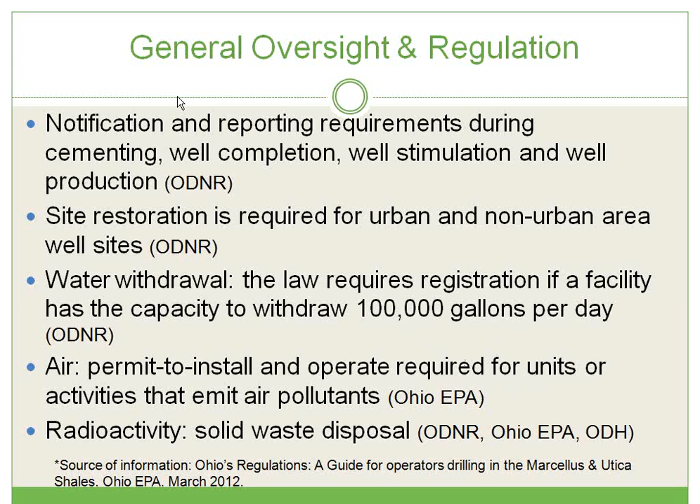In addition, we have been told that there are memorandums of understanding or agreements for collaborations between these agencies. We have not seen those documents and do not know to what extent or how specific those agreements are and that collaboration, but we have been told that that should be happening to some degree.

So I just want to very briefly go over some basic definitions with some terms that you'll be hearing upcoming in the presentation, and my colleague Julie Weatherington-Rice will go into these in greater detail and has a much better expertise level with these, but real basically I want to point out what are some of these shale gas wastes that we see, these waste streams. So we have brine, and these definitions are most often derived from U.S.

EPA. We have brine, which is simply, in its most simple form, a combination of salt and water, but important to note when it comes to shale gas or fracking that this brine often includes other materials like chemicals, heavy metals, and potentially radioactive materials. Flowback fluid, a little different from brine, but it's recovered fracturing fluids that come back up to the surface. You'll also hear this referred to as produced water.

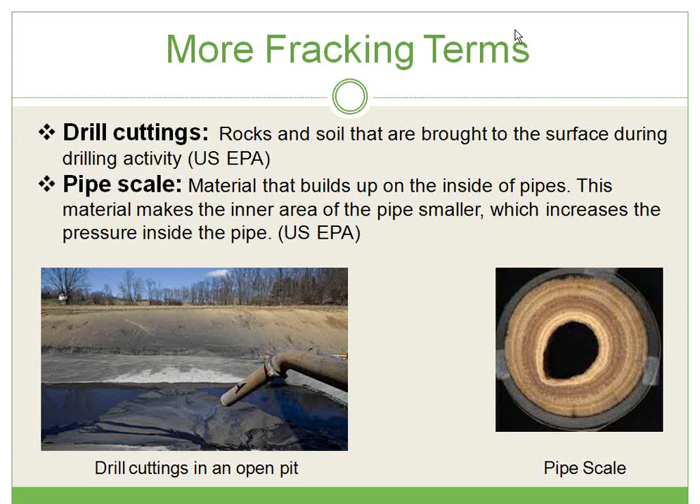But even with there being liners in these impoundments, that doesn't mean that the linings don't leak. And in fact, my colleague Julie Weatherington-Rice tells me that based on some different scientific models that have been produced, we assume a certain rate of leakage of these liners. And so this really highlights the importance of tanks, frac tanks, storage tanks as a better choice of storage of these materials, which can include some nasty chemicals and radiologic materials.

But of course, we also know that there can be issues with these storage containers as well. They can be leaking or have spills in the emptying and or filling process. So nothing is really leak-proof or leak-free, but we wanted to point out to you what these open pits and these impoundments look like.

Also important to note that these, although we're being told are not best practice by industry, are still allowable within Ohio's revised codes, and we've seen a lot of these in Pennsylvania, and so it is still potential and allowable under Ohio law, and something that we could see here in the state of Ohio. So having gone through some background slides to lay the groundwork for you, we hope that that's helpful.

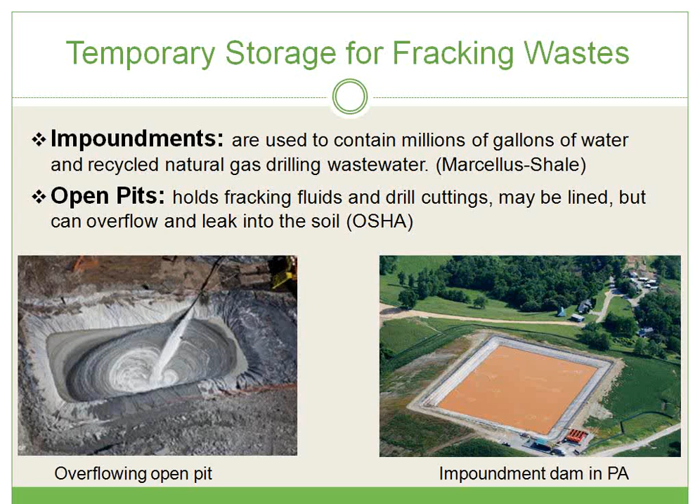I have spent pretty much this year looking at the waste streams because of the fact that we're importing more waste than we're making here in Ohio. And so therefore, since we are net importers of waste, we needed to understand what was in it, where it was going, and what kinds of problems we might have related to where it's being placed and if there was any spillage associated with it.

I got involved in this because my firm does a lot of work with public water supplies, especially well fields. And in eastern Ohio, all of the well fields have oil and gas leasing all the way around them, and some of them even have oil and gas wells in the shale underneath them. So this is a daily thing that they have to live with. And because we don't have home rule protection anymore available to local governments, we had to be smart about what the possible risks were and think about how we might put protection in place. So that's really how I got started on this.

The first slide I'm going to talk about has to do with radioactivity. We hear about the radioactivity in the Black Shales and in the brine, but I think one of the things that we need to understand is where does it come from? And it comes from where everything comes from. We are stardust, and so is everything else around us, including the Black Shale.

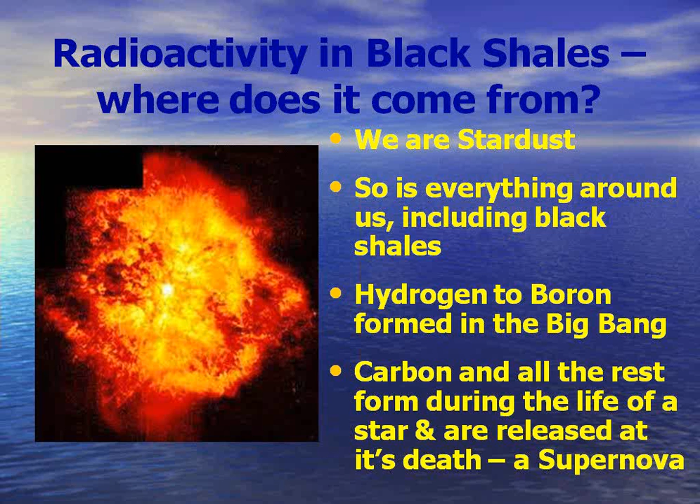When you look at the universe, from the Big Bang, we got the elements hydrogen through boron. And all the other elements, all the way through the radioactive decay chain, all come from supernovas at the deaths of stars. And when they die, that dust comes out into the universe and eventually coalesces, and in our case, became Earth. And so when the Earth was formed, it was formed with these radiological components to it as well as everything else.

So when we look at Black Shale, it's actually naturally radioactive, and we'll talk about the NORM and TENORM, but it's actually radioactive for two different reasons. Part of the reason it's radioactive is because of the material that the shale is made up from. Shale is a sedimentary rock, and it's essentially clays and organic materials that have washed in off the uplands into either a marine or a freshwater environment. The shales we're talking about are marine.

And the Marcellus is Devonian in age. It's about 300 million years old. And it comes from the Appalachian mountain building. That's where the material comes from. The Silurian Utica is older. It comes also from mountain building, but also off of the Canadian Shield. Since the mountain building is igneous rocks, fire rocks, they bring with them radiological material in the magma, and so it gets transferred down to the shale.

Now, once it becomes shale, then we have something called bioaccumulation happening. And what does that mean? Well, if you know anything about a water softener, or if you've ever used a Brita water filter on your faucet, essentially what happens is that anything that is carried with water attaches itself, the heavy metals, the radioactive metals, to the clay minerals and to the organic material in the shale.

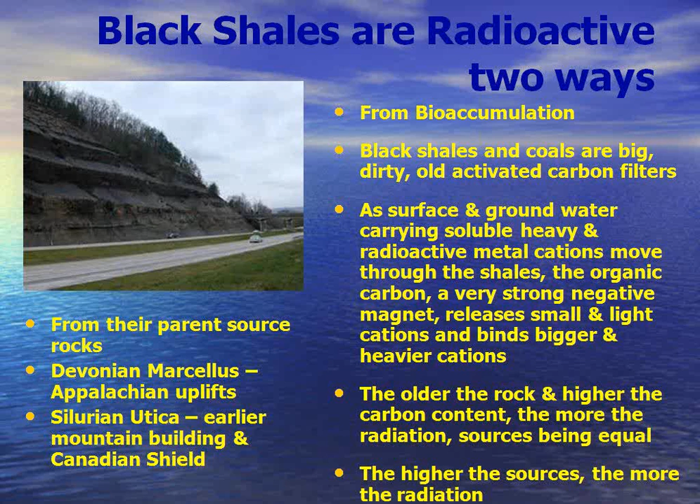And the problem that we've got with the shale is that it's like a filter that nobody recharged over 300 million years. So you've got a whole lot of junk that's attached itself over those years, and it's in the shale itself, or it's in the brine. And so it's just naturally there. And the older the rock is and the higher the carbon content, the more radiation you're going to have.

Now, when we're looking at the shale gas waste this year, we did a definition, and we broke it down as Melanie just talked about. We looked at the ground shale rock. We looked at what Ohio was calling it and what US EPA was calling it, because it makes a difference in terms of whether you have to test for it or not. Our ground shale rock, Ohio is determining as NORM, naturally occurring. US EPA calls it TENORM.

The drilling muds, everybody agrees that those are TENORMs and those should be tested. Fracking fluid, Ohio says they're NORM, US EPA says they're TENORMs. The brines, the salts, those are NORM by Ohio standards, those are TENORM by US EPA standards. And then we also have drilling waste, site wastes, and other releases. And so when we look at the waste streams, those are the main things that we're looking at.

In Ohio, according to the new budget bill, we only have to worry about monitoring the drilling muds, the sludges, and the materials in the scale in the drilling pipe. Everything else is free of any kind of testing or any kind of requirements. Now, how did we get into this confusing state of situations? Well, there's actually 4 national definitions for NORM and TENORM. And Ohio uses the oldest one, the least restrictive one.

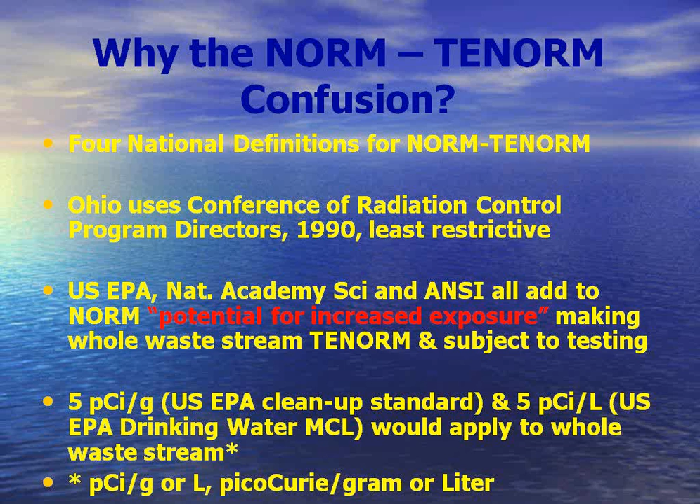Now, why is that important? Well, because there are a couple of numbers you have to remember, and when you look at these numbers versus the real numbers, it'll make you realize why this is important. US EPA cleanup standards say 5 picocuries per gram, and drinking water standards are 5 picocuries per liter. Now, if you go above that, you're no longer clean and it's no longer safe to drink. Those numbers are very low, especially when we start showing you the numbers that are out there.

Why are we concerned about these waste streams coming into Ohio? Well, Ohio has this tradition of funding our state and local governments from tipping fees and other sources of money that comes from out-of-state waste streams. We've been doing this for at least 20 years, and we have funded many of our programs from these out-of-state waste. So when there was this explosion of waste coming out of Pennsylvania and West Virginia, it was a new source of revenue for Ohio if they brought it in.

And so they went out and essentially solicited and set up Ohio so that they could import these waste streams into Ohio so that they could charge a fee on it to help run the government. But I think the thing that's really important to remember is that Ohio does not have magic geology. It isn't like it instantly can take anything and swallow anything and never have repercussions. But when you look at the way the waste streams are being handled in Ohio, you come from the assumption that it can take everything, but it can't.

We're also concerned because black shales are early sources of uranium ore. They were part of the original uranium sources for the atomic age and the Manhattan Project. Black shales are like coals. They're full of heavy and radioactive materials. It's especially the thorium-232 to radium-228 series and the uranium-238 to radium-226 series that are the most common in our rocks. And the radiums and the uraniums are soluble. They're water soluble. They're also in the brines, so they're easily transported to the surface.

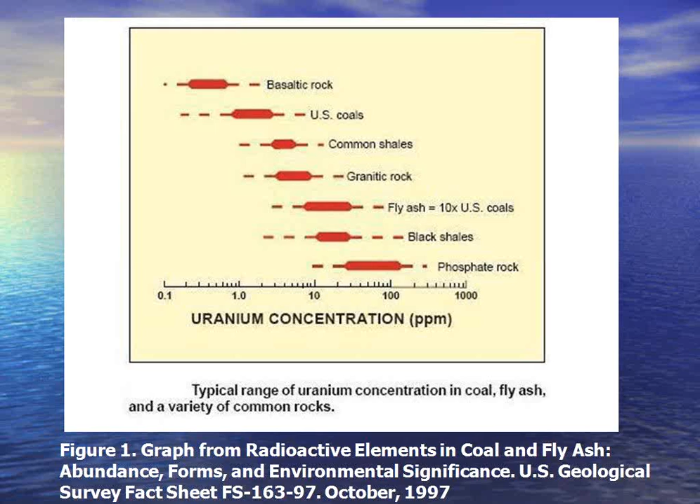We're also concerned about the radioactivity in the brines. We know that New York has got brines that measure up to 15,000 picocuries per liter of radium-226. Remember, the number is 5. Now we're at 15,000. And the scale buildup on the inside of the pipes can be as much as 6,000 picocuries per gram of radium-226 and 2,000 picocuries per gram of 228. So those are TENORM handling. Even Ohio agrees to that. But I think it's important to remember that we still have contamination in Ohio from the Manhattan Project, and we are much wiser than our current administration is giving us credit for in terms of handling these materials.

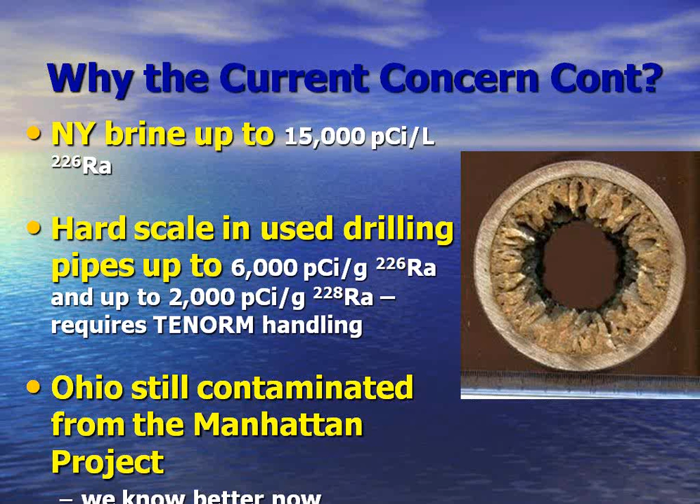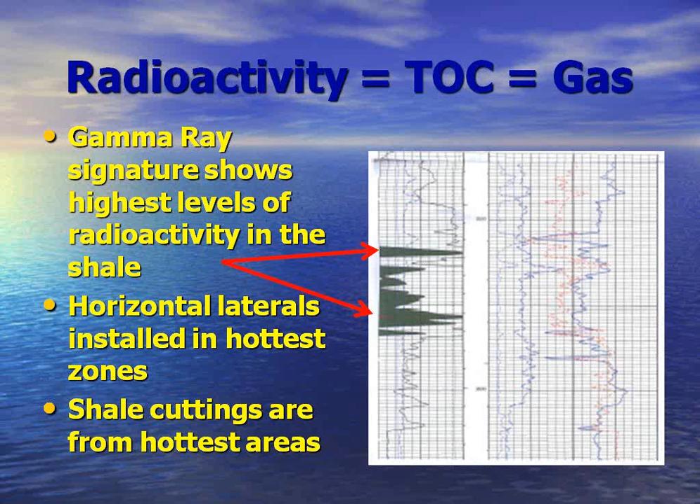Why is the radioactivity such an issue? Well, it's because the total organic carbon level in the shale is where the oil and gas is found. And so what they do when they drill is they send a piece of equipment called a gamma logger down on a wire, and they look for the very most radioactive parts of the shale. And that's where they put their horizontal drilling, because they're going to get the most oil and gas from that area. So we're not dealing with the average radioactivity of the Utica or the Marcellus. We're dealing with the very most radioactivity of it. And we have a health risk to be considered.

What happens, because radium is water soluble, is if you drink it, it will replace the calcium in your bones, and now you have radioactive bones. You also have a problem with lead-210, which also comes out of the radioactive decay chain, and that will also go into your bones. And once they're in your bones, they don't just sit there in that element. They will continue to decay. So now you've got decaying radioactive isotopes in your body.

We also find that there's some very high numbers of potassium-40, which is also radioactive, that's showing up in some of the drilling muds. We're not really sure where that's coming from. We are a growth industry for shale waste in Ohio. We've got it coming in by road, by rail, and we're setting up a river barge port already in Washington County.

More than 50% of the Class 2 injection well materials that were injected in Ohio last year came from out of state. So we are a net importer, and we are now to the point that we are constructing dedicated out-of-state Class 2 wells that just simply bring in brine and drilling fluids from out of state. We're not even taking Ohio waste in those. One just got put in Athens County.

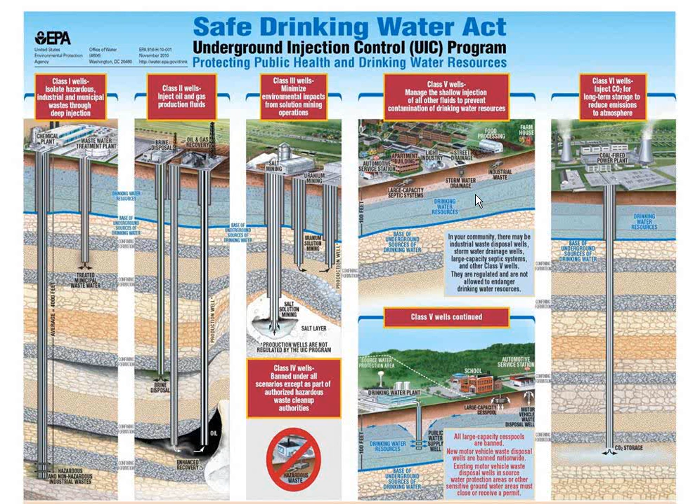This slide gives you a little idea of where in the strata each of these classes of wells are injected. You can see the Class 1 injection well, again, the hazardous waste, or as defined as hazardous waste, that goes down into or below an aquifer containing over 10,000 parts per million of total dissolved solids. Class 2 are the liquid waste that come from the oil and gas industry. I refuse to call them brine. They're not my grandma's pickle liquor.

Class 3 wells are, again, the material that's recovered from salt mines, those type of things. Class 4, again, have been banned, and Class 5, again, are the non-hazardous injection from a deep aquifer. Class 5 wells can also be aquifer remediation wells. We have almost 6,000 aquifer remediation wells in the state of Ohio. So that means that we already have aquifers that are contaminated, and we certainly don't need to be putting more and more of our aquifers in danger. Next.

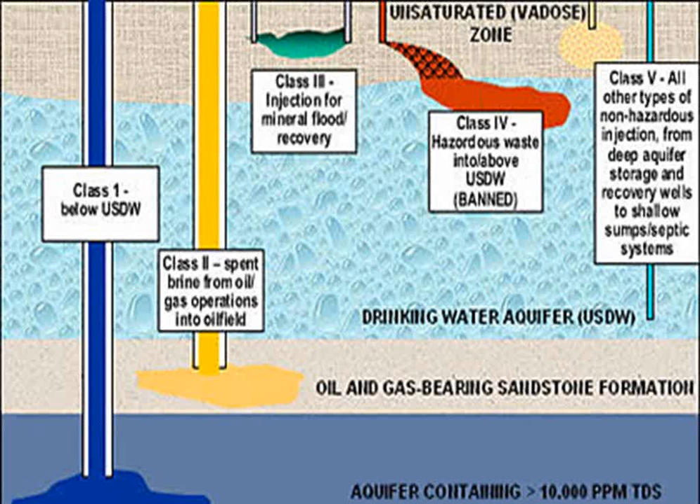Okay. This is a newer injection well that's located in Coshocton County. You can see the different gauges that are on it. These would be the injection pressure and then the annulus pressure. And this is how they decide and determine if an injection well is in compliance with their permits or if there has been a leak that has occurred. Next.

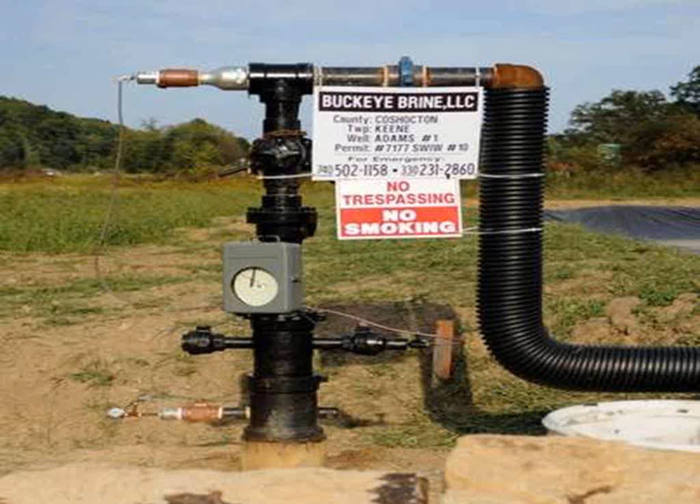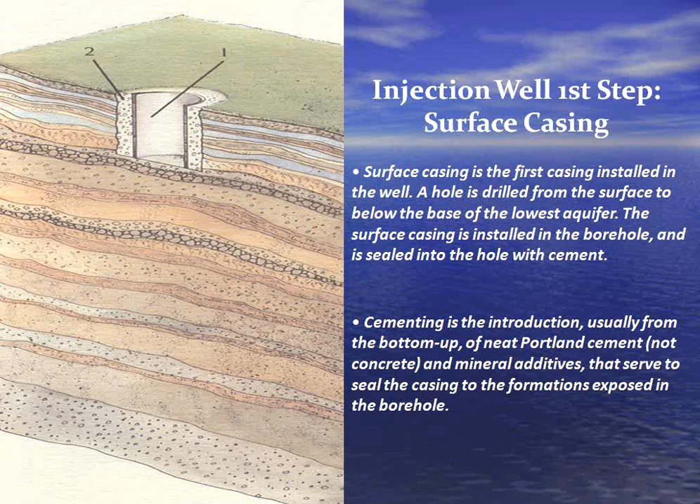Okay, this is kind of your basic injection well 101. The first step is that they drill the surface casing down to a depth of 50 feet below the lowest drinking water aquifer. And then they cement that casing in place. Cement is introduced usually from the bottom up, and it is cement, it is not concrete, with mineral additives that serve to seal the casing to the formations exposed in the borehole. Next.

Then the second step is the long string casing. I think this slide is important because you've seen probably in some of the industry's television ads how many layers of protection they have, 7, 8, 15 layers of protection. Well, this is basically it for our older injection wells. We have a long string casing that's installed within the surface casing. Imagine a pipe within a pipe.

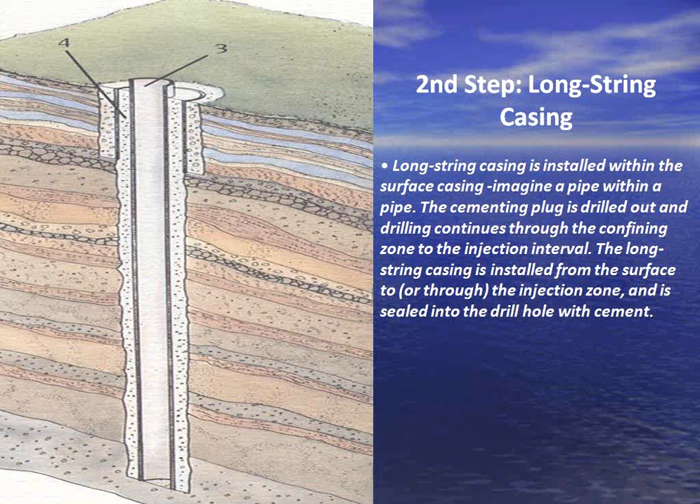The cement plug is drilled out, and that plug would have been when they first cemented in the surface casing. The plug is drilled out, and the drilling continues through the confining zone into the injection interval. Long string casing is installed from the surface to or through the injection zone and is sealed into the drill hole with cement. A lot of people think that with injection wells, there's an underground tank or something that's confining this waste. And there's no such thing as a tank underground on these injection wells. Next.

Okay, the injection tubing: on an old oil or gas well, the production tube is switched over to an injection well by just placing another tube down in the production tube. So this is like a rubber liner within your car tire, something on that order.

The tubing is the smallest diameter in the well. The tubing is installed within the long string casing, and it carries the injectate from the surface to the injection zone. It's usually constructed of corrosion-resistant steel or fiberglass reinforced plastic, and the tubing is typically anywhere from 2.5 inches to 7 inches. The largest one I've found in Ohio so far is 4 inches, and I have found one that's as small as 1.5 inches. Now imagine trying to inject millions of gallons of this waste down a 2.5-inch diameter pipe. That's why they have to operate at such high injection pressures.

A packer is a mechanical device that's installed on the outside of the injection tubing, and it's to isolate the injected waste from the annulus. The wellhead seals the gap between the tubing and the long string casing at the top of the tubing. The packer annulus is the space between the outside of the tubing and the inside of the long string casing. The annulus is sealed at the top by the wellhead and at the bottom by the packer. Pressure can be maintained on the annulus and monitored by the injection well operator. Any change in pressure indicates a leak in the system.

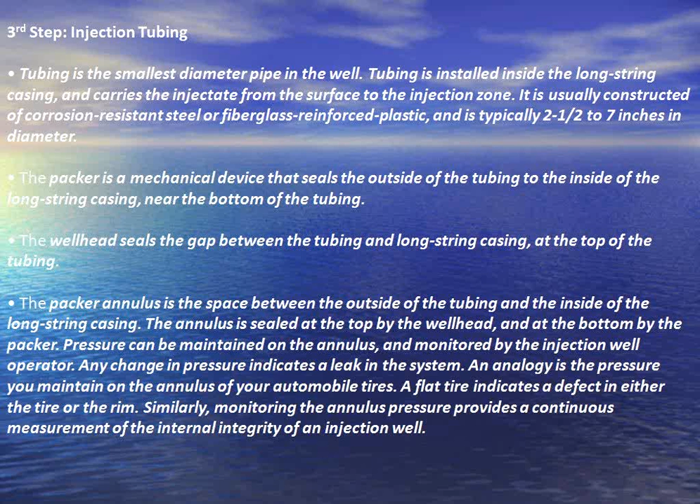This is just a drawing that I did to give people an idea of the actual size of an injection well. The outer rim is 8 5/8 inches, which is typical for the older types of injection wells. That would be your surface casing, the 8 5/8 inches, and that would go down to 50 feet below the aquifer. The second string or the long string casing, or in an old well, the production casing, is 4.5 inches. And then within that 4.5 inches is the 2 3/8 inches, which is now the injection tubing.

And if you'll see, there isn't a lot of room around either one of these pipes to be installing very much cement. It's less than a 1-inch radius of fluid around the injection tubing. So the annulus is not filled with cement, the annulus is filled with fluids. And that helps keep the injectate from coming back up into the annulus. Next.

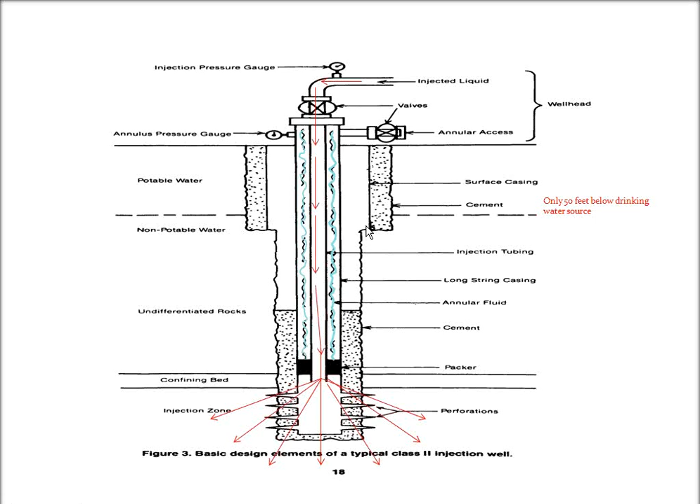This just gives you a little idea of the side view of an injection well. Here would be the surface casing, again down 50 feet below the drinking water source. Here would be the cement casing. This is the long string casing. This is the injection tube. In between the injection tube and the long string casing is the annulus, and this is filled, as I said before, with fluid. This black area here is considered the packer. The packer keeps the waste that's injected here from going right back up into the injection well.

Can you go back 2 slides for me? Another one? There, thank you.

And as I said before, here is the injection gauge pressure, and here is the annulus pressure. The injectate goes in this tube, comes down, and goes out. This picture is a little confusing because it does look like there is cement here, and typically there is not. On some of the older wells, there may be, because the well may have been perforated because it was a vertical well at one time.

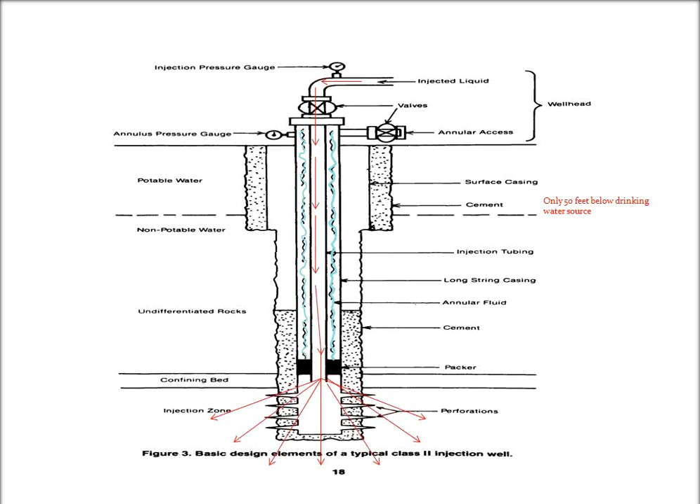Okay, injection wells are regulated under the Safe Drinking Water Act, and that's the main federal law that ensures the quality of Americans' drinking water. The Safe Drinking Water Act was originally passed by Congress in 1974 to protect public health by regulating the nation's public drinking water supply. The law was amended in 1986 and 1996 and requires many actions to protect drinking water and its sources, such as rivers, lakes, reservoirs, springs, or groundwater wells.

The definition is: supplies any public water system or contains a quantity of groundwater sufficient to supply a public water system. The key word in this definition is public. The Safe Drinking Water Act does not regulate private wells which serve fewer than 25 individuals. So in most of our rural communities where they do not have public water supplies, no one is protecting that aquifer.

So how did we get to where we are today? In 1974, responding to concerns about the underground injection practices, including failures of some wells, U.S. EPA raised concerns that injected waste could contaminate groundwater, underground drinking water. In December of 1974, Congress enacted the Safe Drinking Water Act, which required EPA to set requirements for protecting underground sources of drinking water.

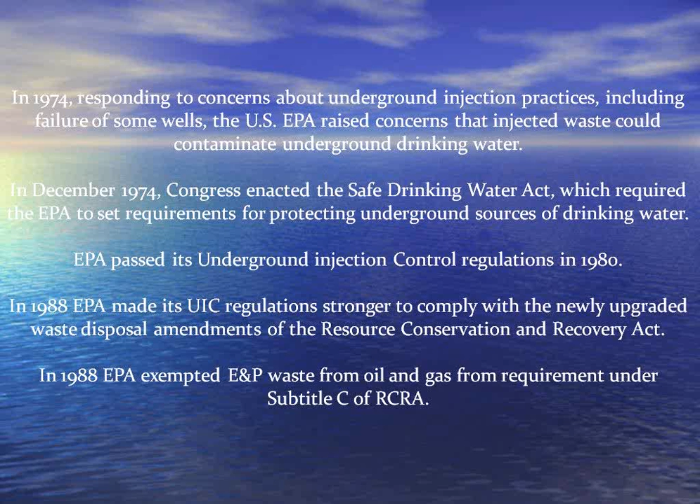The U.S. EPA passed the Underground Injection Control Regulations in 1980. In 1988, EPA made its Underground Injection Control Regulations stronger to comply with the newly upgraded waste disposal amendments under the Resource Conservation and Recovery Act, or what you may hear called RCRA. In 1988, EPA also exempted the E&P, which is exploration and production waste, from the oil and gas from requirements under Subtitle C of RCRA. And Subtitle C of RCRA is whether a waste is determined to be hazardous or not.

In its 1988 determination, EPA admitted that exploration and production waste contained toxic substances that did endanger human health, and they noted that benzene, phenanthrene, lead, arsenic, barium, antimony, fluoride, and uranium found in the waste were a major concern at levels that sometimes exceeded 100 times the EPA health standards, but EPA declined to regulate the toxic substance under Subtitle C of RCRA.

EPA issued three factors for their determination not to regulate this waste under RCRA. And those were the infeasibility of implementing alternative regulations, the adequacy of state regulations, and the one that was most troubling to me is the economic harm that would befall the oil and gas industry if additional regulatory controls were imposed. All three of these factors should now be null and void. And I think that's the end of my presentation.

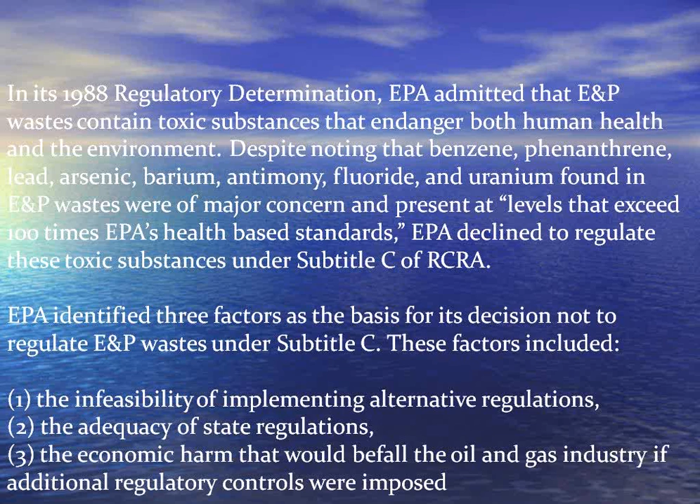So I'm turning it back over to Julie. Hi, thank you again. We're getting started at this. No, we've gone back. No, I think it's there. Can you get rid of that? Okay, thank you. Thank you very much, Teresa.

Not all liquid materials have to go into Class 2 injection wells. We have some other options. One of the options right now that's taking place in Pennsylvania, West Virginia, and Ohio is the recycling of the fracturing fluids themselves. We have several programs ongoing, and they're becoming more and more common. Why is this happening? Well, remember, we're talking about 5 million gallons per well to fracture, and if we can save part of that water, then you don't have to buy it for the next round. Also, you may be able to recover some of the fracturing chemicals, so it's actually a savings for the drillers if they've got another well to send it to.

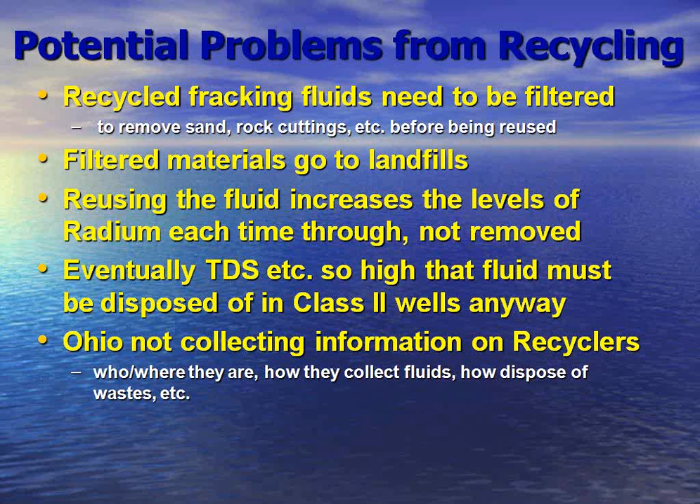And eventually, the total dissolved solids become so high that you can't really use the water anymore, and at that point it does have to go to a Class 2 injection well anyway. But you have saved a significant portion of the waste stream from going directly to a Class 2 by reusing it. I think it's really important to note that Ohio does not collect any information at all on our recyclers. We don't know who they are. We don't know where they are. We don't know how they collect the fluids. We don't know how they dispose of the waste, any of that. Most of the information we have on recycling actually comes from Pennsylvania, who talk about what they're sending to Ohio recyclers.

Probably the most famous or infamous recycling system is Patriot Water Treatment and the Warren, Ohio Wastewater Treatment, the process that they're using at their plant. Essentially, Patriot takes in the fracking fluids, not the brine, but the fracking fluids, and they're trucked to their facility in Warren. They then filter out any of the solids, and the filter cake probably goes to a landfill, and it's blended around through a number of tanks, and then it's simply metered out to the Warren wastewater treatment plant, who then blend it with their sewage and put it through their treatment, but it doesn't do anything about the dissolved solids, and it doesn't do anything about the radiation.

And at that point, they just release it to the Mahoning River. Patriot and Warren wastewater treatment plant check for radium, but they use a handheld monitor, which doesn't really give you any information. When we asked who gave them approval to use that monitoring system, EPA said that Ohio Department of Health must have approved it. Ohio Department of Health said, oh no, it must have been Ohio Department of Natural Resources who approved it.

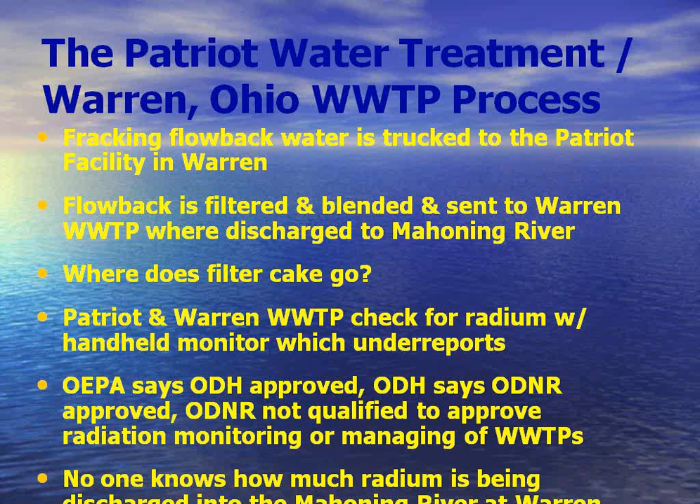What we're finding is that the handheld and stationary gamma radiation detectors actually tell us nothing about radium levels. And the reason for that is because radium emits either an alpha or a beta, depending upon which radium it is. 226 is an alpha, 228 is a beta. So they don't emit a gamma. And so you can't just measure it.

So what you have to do is take the sediment or the soils or the rock or the flowback water or brine and put it in a jar and seal it up for 21 days at least. And what happens then is that radon, which is a gas, grows out of the radium, and then it grows polonium-218. And what you actually measure is the gamma of lead-214 or bismuth-214. So you're actually measuring the great-granddaughters or the great-great-granddaughters of radium-226. You're not actually measuring the 226 itself.

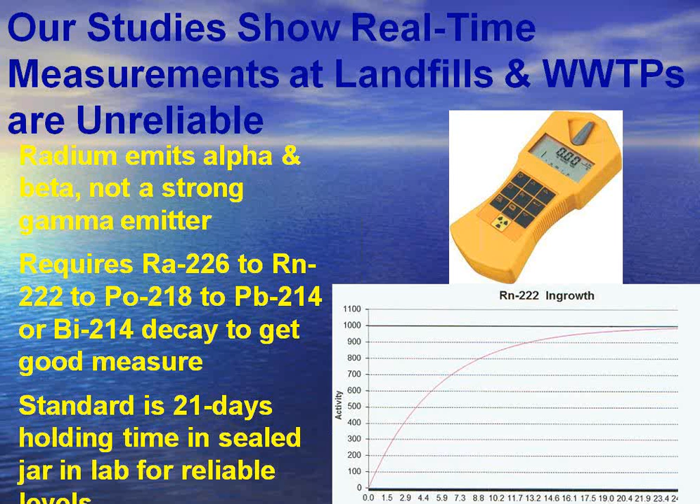So this is a picture of a decay curve that comes from the Department of Energy, and it essentially shows you if you don't wait long enough, you can't get any kind of an idea of what the loading is. So you cannot do this in real time. You have to do it in a lab setting, and you have to hold on to the samples for a while.

You can repurpose pretty much everything out of the oil and gas brine. Pretty much everything has an industrial application and a current market. We already mine salts out of Ohio for industrial applications. The DOE and GE are working on a process to remove the radiums from the brine. And we already have the technology to break down the oil and gas brines. But the issue now is working on the economics.

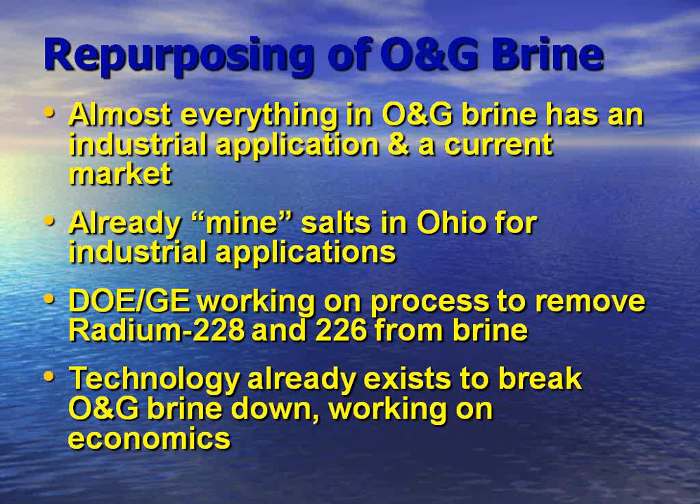But if you factor in what it costs you to drill a saltwater well, what it costs you to bring it up, what it costs you to process that, if you saved that money because you were reprocessing the oil and gas brine, that would go some of the distance to making this an economically feasible process.

We do have some questions about why would we dispose of these resources when we have other uses for them, and we could still tax, we're getting 20 cents a barrel, we could still tax the out-of-state brine if we reprocessed it here, and if we reprocessed it here, we might actually get some jobs out of this for Ohio.

All the solids at this point are going to the landfills, and with the exception of the drilling muds and the sludges, nothing has to be measured for radioactive levels. And the drilling muds and the sludges can be down blended, mixed with dirt to get them under the 5 picocuries per gram level, in effect diluting that radioactivity. But there's no requirement in the budget bill or anything that's been put together at this point that requires that radioactivity to be chemically bound.

And so since it's not chemically bound, it will move out of the material that it's been put into, and it will go into solution and go into the leachate at the landfill. And so then you move it out of the landfill into the leachate. The leachate is collected. It goes to a wastewater treatment plant. They are not equipped to take care of the radiation, and it ends up in whatever the stream is that they're dumping into.

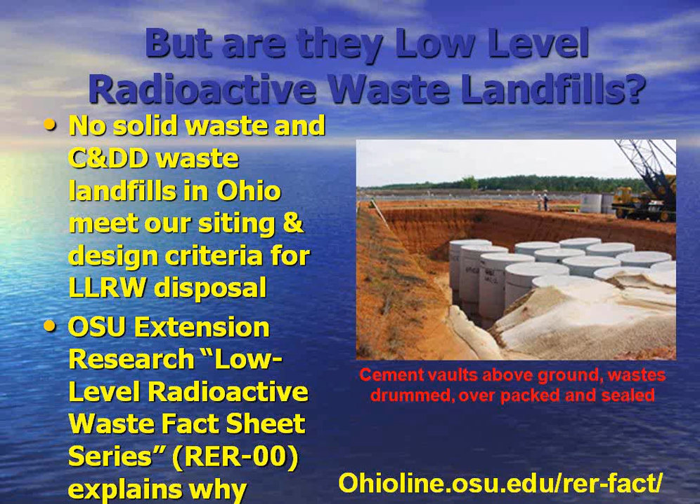Solid waste landfills, construction and demolition debris landfills are not low-level radioactive waste landfills. We don't have any of them in the state of Ohio that meet our siting requirements and the design requirements. They simply don't do it. There are some good fact sheets online at OSU that explain what you have to have for a low-level radioactive waste landfill, and ours don't look like this, and we're not managing them this way.

Michigan is doing something interesting, as is Pennsylvania and West Virginia. Michigan is taking the waste in, but they are putting them into something called a monocell, a separate cell that they have a GPS location on so they know where it is. And they're taking up to 50 picocuries per gram.

Well, how long does that site have to be safe? Well, if you use their numbers, for the radium in that monocell to be safe, you have to go another 5,000 years into the future before that will be safe. If you're concerned about the uranium, now you're looking at a half-life of 4.46 billion, with a B, years. So now you're 3.5 times that. So now you're back to the age of the universe.

So you literally have to protect this site till as far in the future as the universe goes back to for its creation. And for thorium, we don't have a number anywhere near this. Now you're at about 45 billion years. We've got nothing that old that we know about. So you're really creating a sacrifice zone that has to be kept separate for all time.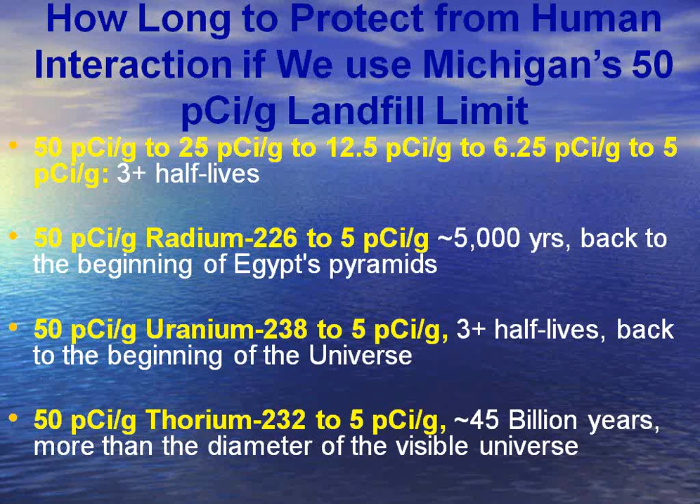And their position is that this isn't something that they're only going to worry about for 30 years. Their position is they're probably going to have to test these landfills forever. In Ohio, we're just mixing it into the face, and we're just ignoring most of it. There are other solutions to brine disposal that we know for a fact will reach the water.

You can use brine in Ohio for de-icing of roads in the winter, and you can use it for dust control in the summer. What happens is it either washes into the groundwater or into the surface water, but the heavy metals and the radioactive metals attach to the dust on the road. So then when you drive over the road, the dust flies into people's yards, onto their vegetable patches, and you translocate those heavy metals, those radioactive metals, into people's property. And that's one reason why this is a really bad idea.

We also have folks that just simply dump it down the storm sewers or dump it into the river, and we have a number of those events. We've had at least 3 cases in Ohio since January of companies that have had injunctions against them and are being sued by the state of Ohio for disposal of brine illegally.

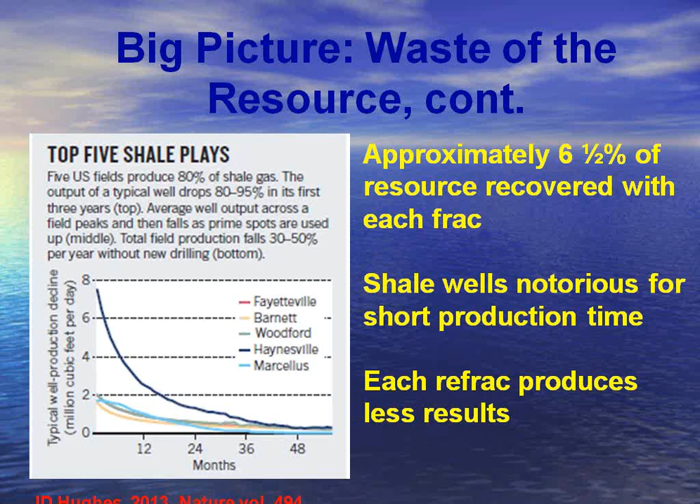We've been down this path before. In the 1890s, the Lima Findlay oil field was the biggest oil field in the entire United States, in the entire world. That's how J.D. Rockefeller and Standard Oil got started. But what happened was, because they were so new to this process, they drilled so many holes in this oil field that they depressurized the entire oil field.

And there are estimates that as much as 90% of the oil and gas is still in the ground there. And we cannot get it out because we would have to find all of these old wells. We'd have to seal them up, and we would have to repressurize the field to be able to get it back out. So 120 years plus down the road, we've still got maybe 90% of the source down in the ground, and we can't even get it out because we messed it up so thoroughly when we went for it.

So this is one of the big concerns that we've got as we look at this fracturing: are we in effect going to get only a little bit out and then for all time make it impossible to get the rest out? So it's the waste of the resource that may be the biggest waste that we have to worry about.

There are a team of authors from 6 universities and colleges and the private sector that are working on a paper for the Ohio Journal of Science, and it is looking at the drilling of the Utica and Marcellus shales in Ohio. It's what we know, what we don't know, what are some of the environmental and legal issues and controls that are in place, what are the public health considerations and the socioeconomic considerations. This paper should be finished this fall. It will be published online immediately, so I would suggest keeping track of this website at Ohio State, because once it's ready, it'll be up and available to everybody.